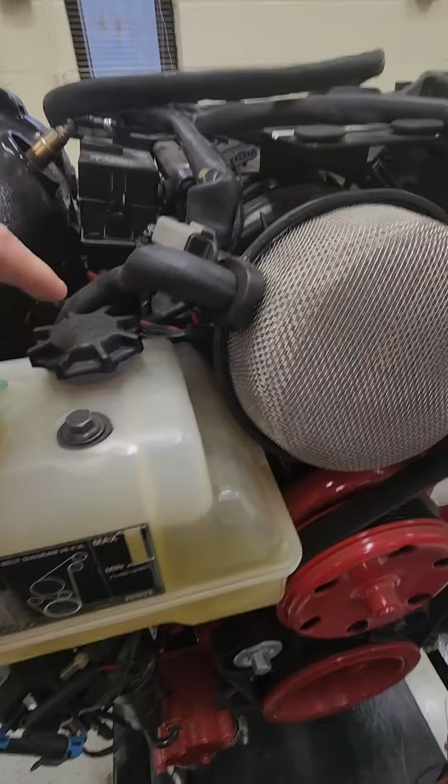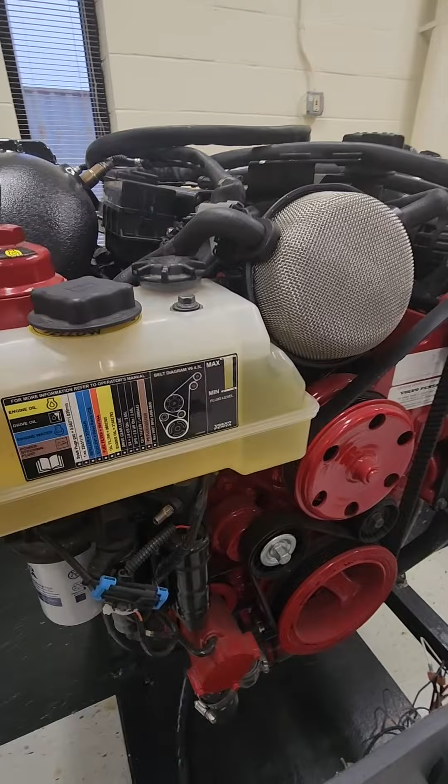There is a gentleman that apparently has a leak someplace on it, and it's only when it's cold, which is interesting. A little bit of antifreeze, summertime it's fine. My guess is when it gets cold it shrinks, and he's trying to get this tank off, so we're going to go over how to remove this tank. There are drain procedures in the workshop manual.

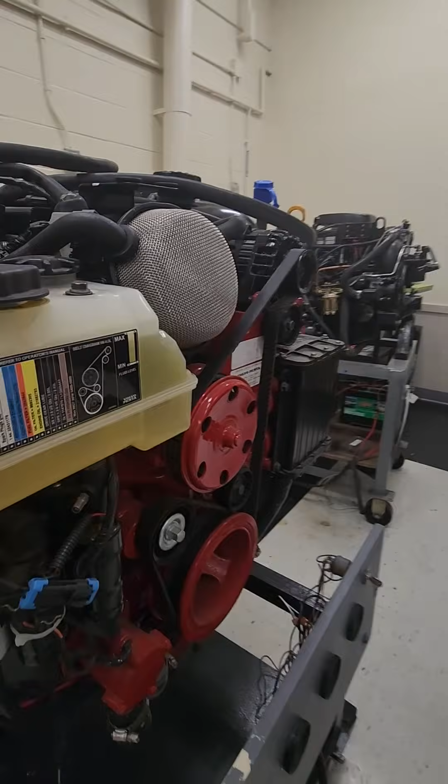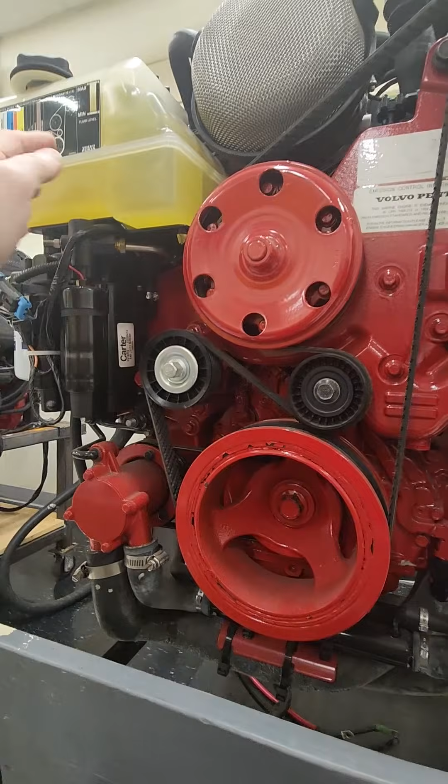Being a 5.3, it's a little more compact, but I'll show you that there are these clips, and these need to be compressed so that the tank can be raised up off of this. So there is one here, and the other one on a 5.3 is difficult to see, but I'll come around the other side here so you can see it. It's back in there, behind the fuel pump assembly.

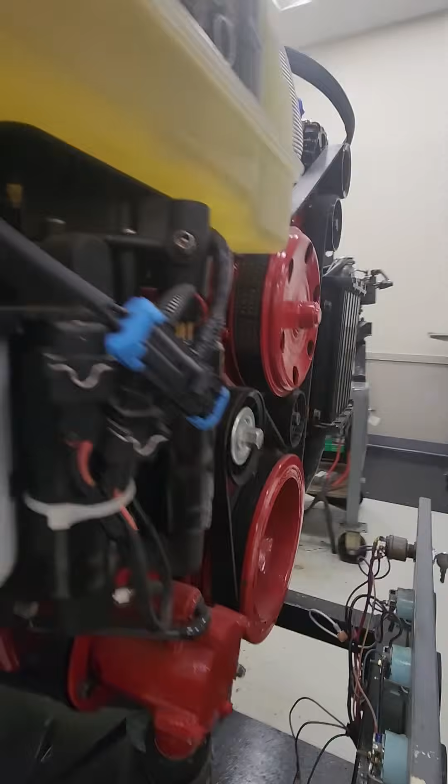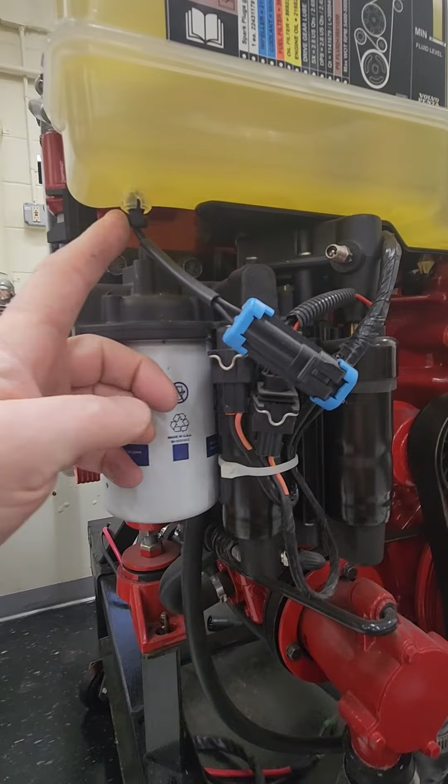So what I would do is unbolt the fuel pump assembly and let that drop down a little bit. You've got a fuel line here, just let that hang out. Make sure you cut the tie wrap here, disconnect this connection. This is your coolant level sensor. And once this is down out of the way, you can get at that back clip.

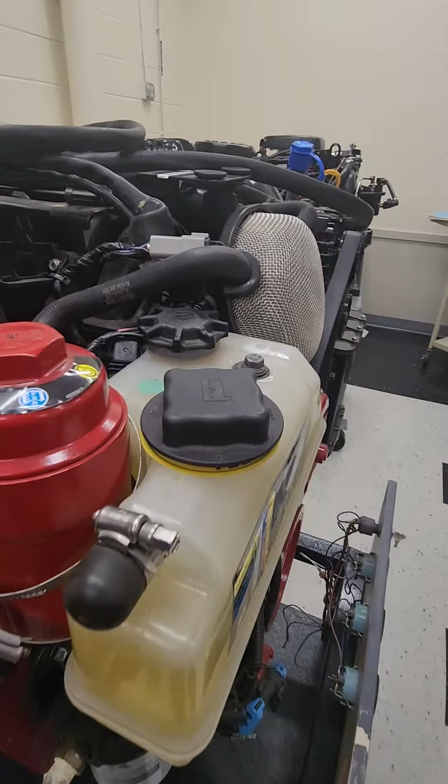There are then two power steering lines that we have to deal with, because if we want to remove this, the power steering lines are going to have to come off as well. One of them is on the back side, one's on the front side, but there also is this hose here, okay? That hose goes from the return, that's your vent hose that comes back. So you have to take this line off to get it off.

That is your coolant line. And then you have this bolt that you have to remove. So we have to unthread it and take that bolt. That bolts into the lower housing here. Now I'm going to go over to this 4.3 because it's a little more compact. There are fewer things in the way here, so you get a better view of what it looks like.

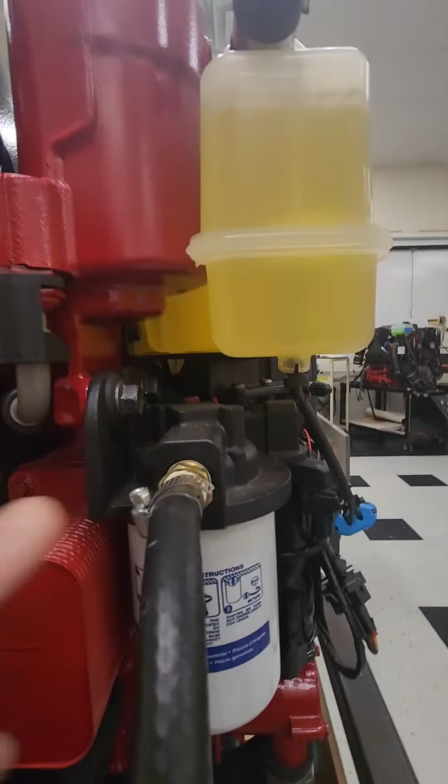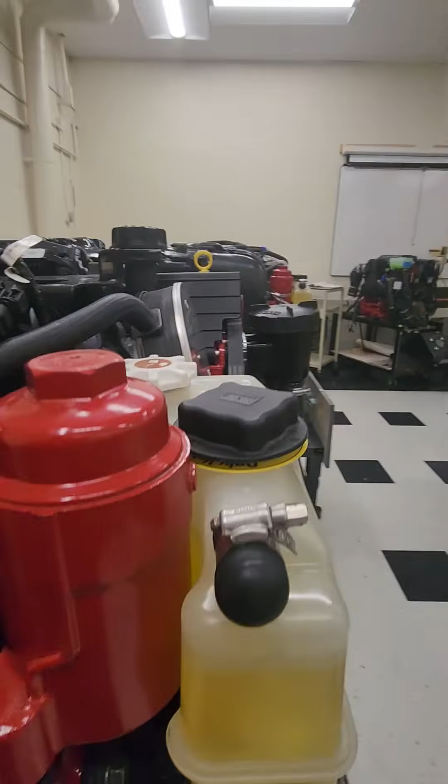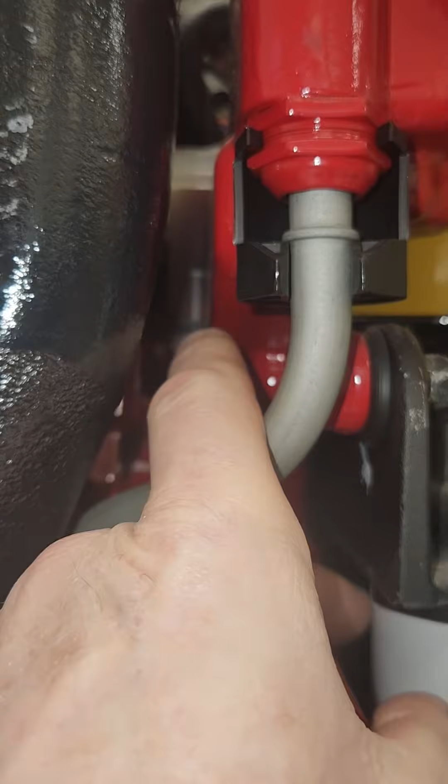So when we come down again on this model, there's that clip you can see way under here. You've got to take these two bolts to get the fuel filter assembly out of the way. Then you're going to again come back here, and again there's that hose, and then we're going to look for those two power steering hoses, and it's a little easier to see on this. One of the hydraulic lines is in the back of the cooler back here, and you're going to have a little bit of play on that hose.

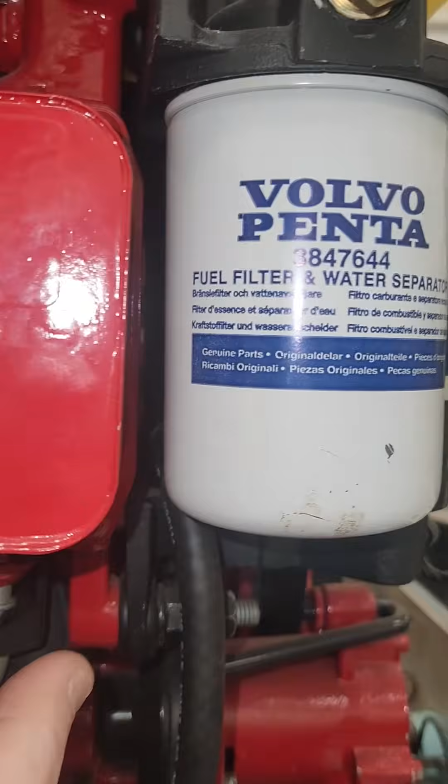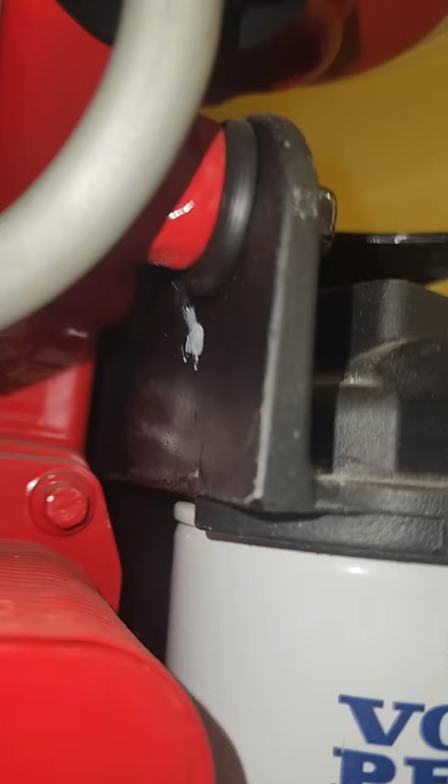That hose comes down here, and that rides up behind the oil cooler. All right, so here is the hose that's the coolant line, and that line comes around and goes to the power steering cooler, okay? And that line comes up here, and you'll see that it goes up behind the oil cooler, and then it goes up to the tank, and you can barely see it.

Back there, and that is going to be another clamp that you're going to have to put back on when you take this off. But you can get the tank off without removing that line. You have enough play there.

And then there's another power steering line. Right, so here is one of the power steering lines. It comes up from the power steering cooler, and that goes up to the bottom. If I back out, that goes to the bottom of the cooler, so that comes up into the cooler. That's a power steering hose.

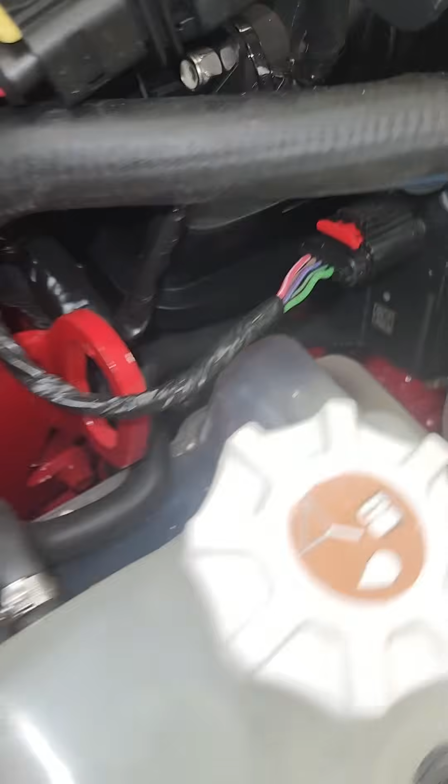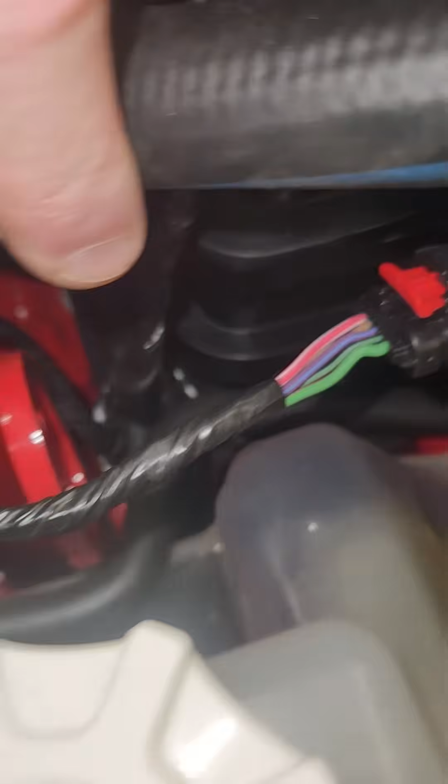The other one is on the top, and it's hard to see, but that one's underneath this hose, and that runs from the front of the engine down under the tank, so it kind of loops around underneath. So those two will be exposed once this comes off.

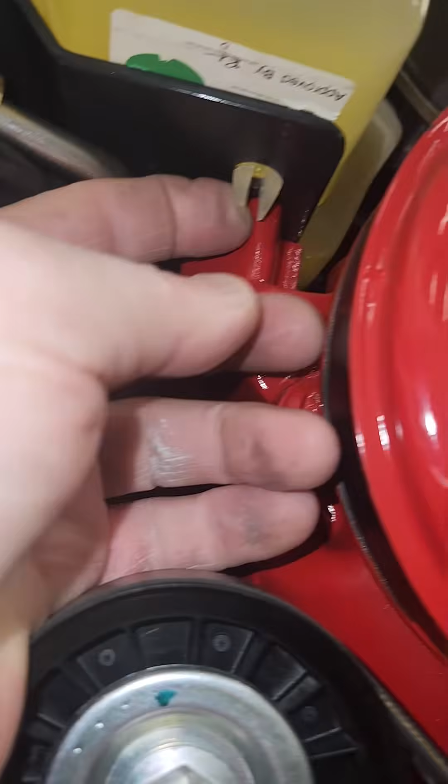So taking this off, probably the best method that I've seen to compress these plastic pieces is to get a short extension and find a socket, like a 12-point socket, and push it up, and the socket will just fit over these, and it will compress these when you push the socket up in there.

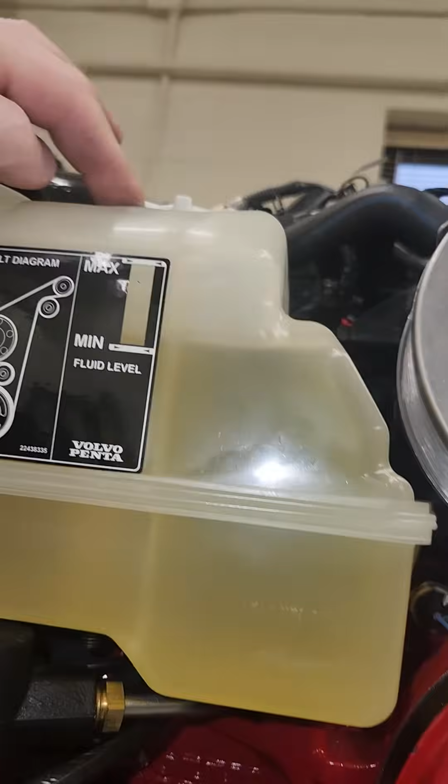The problem is this one, obviously, in the back, you have to take the fuel system, take that assembly out. Take the bolt out. Here's the bottom of the bolt, so you have to take the bolt out of the top. You have to compress this one. You have to compress the other one.

All right, to get these clips out that come through the bottom of it, take an 8 or 9 millimeter socket. I have a 9 millimeter socket in my hand here, and then when you push that in, you're going to put it on a ratchet, and it'll take two people.

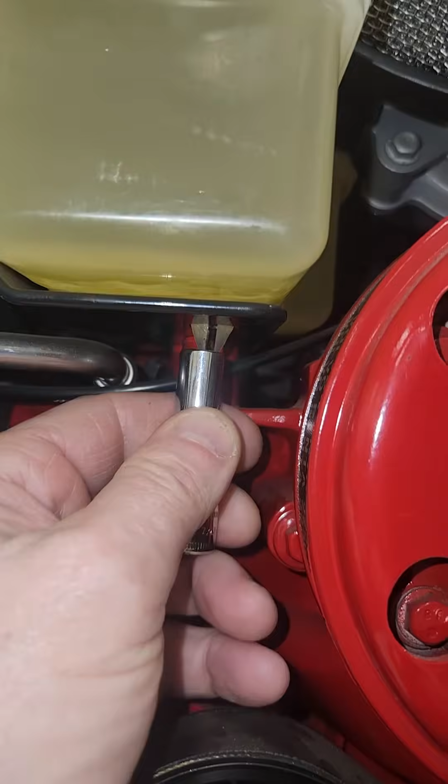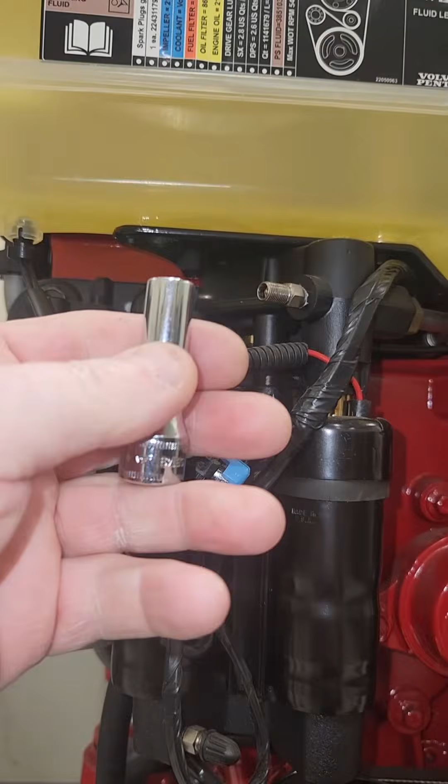Once the bolt's out, you can push on a ratchet real hard and push up on this one, and then take a V-shaped piece of plastic and just slide it in there and just push on it. And while you're compressing this, you can pop that clip loose and have it go around to the other side, right? And do the same thing with the socket and push up on it. That'll compress it so you can get that off.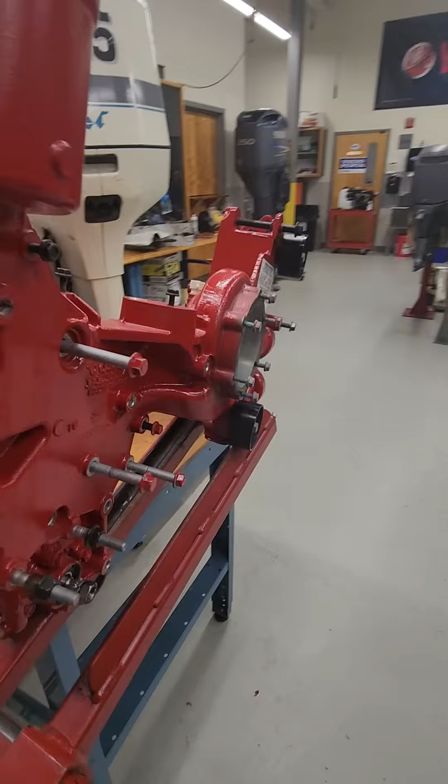You would actually have those two power steering lines. One comes in and loops underneath, and the other one would come up here behind the oil cooler and go in to the bottom of the expansion tank. The bolt that holds it on goes into the plate, so the plate is bolted right here and here.

So here's the plate that the actual expansion tank fits onto, and here are two bolts that I've left in here, so you can see the two bolts that hold that plate, and that's what the expansion tank fits on. Here is a recessed hole, and the expansion tank fits into there. There's two O-rings that go onto that tank, and that's what seals this.

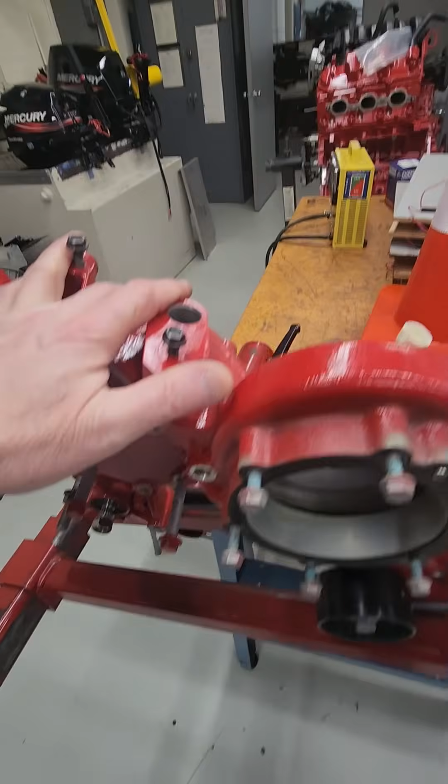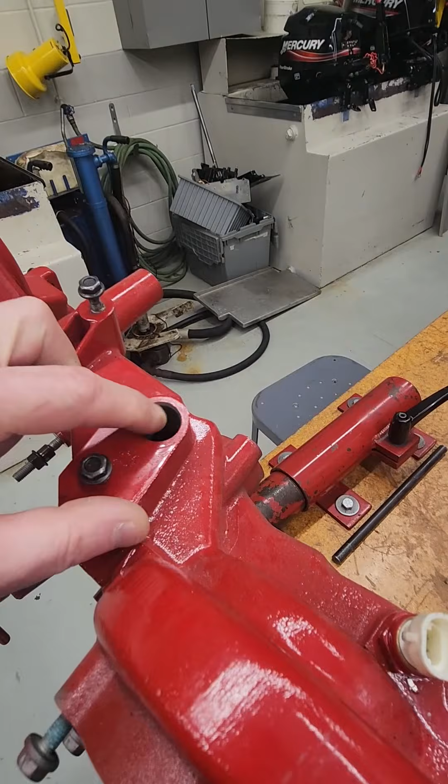So if you did ever take this off, you wanted to inspect it, what you can do is you can take that unit off, and there's two O-rings there to look at and see if they're cut or nicked. And I would look and see if this housing has any issues with it right here, a little corrosion or a nick in it, and maybe somebody caught the O-rings on initial installation.

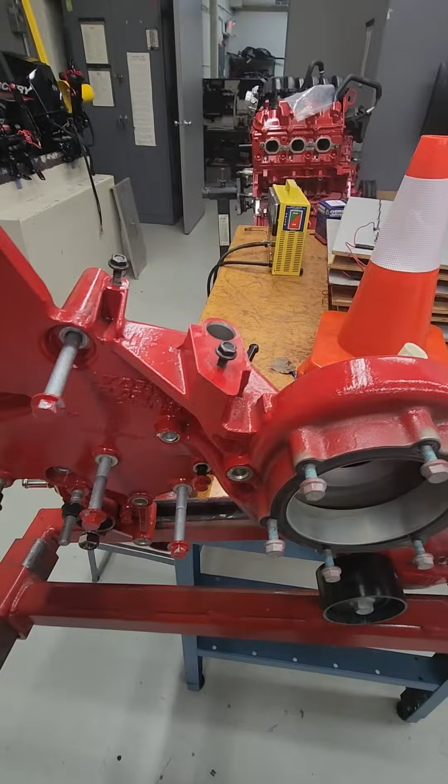I'm not sure where the coolant leak is coming from, but I would suspect it's the bottle itself maybe that's got a crack in it, a very, very fine crack. It is blow molded plastic, and of course, being plastic, getting hot and cold, that can crack. Or it is within the housing here.

So the only place for that to leak really is the sensor in the bottom of the tank, or these two O-rings here. There is no other area, except up high, where you wouldn't be able to miss it, where the vent goes into the engine.

So taking that off, again, you have the two plastic clips. One's about here, one's in the back. You have to take the fuel assembly off to get it out of the way to get to those two plastic clips, especially the one in the back.

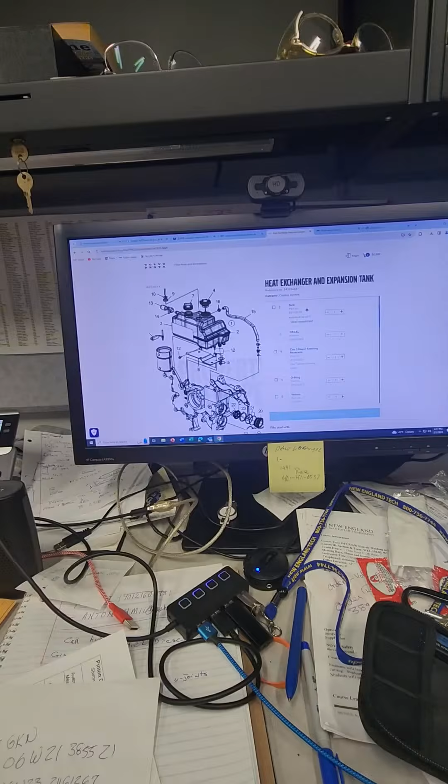All right, here's the exploded diagram of the tank online, and number 5 is the part number for the two O-rings for that tank. And those two O-rings are part number 225-04617. You do need 2 of them. I don't know if both come in the kit. My assumption is, being it says quantity 1, that there would be 2 in the kit, due to the fact that number 5 points to both of those O-rings.

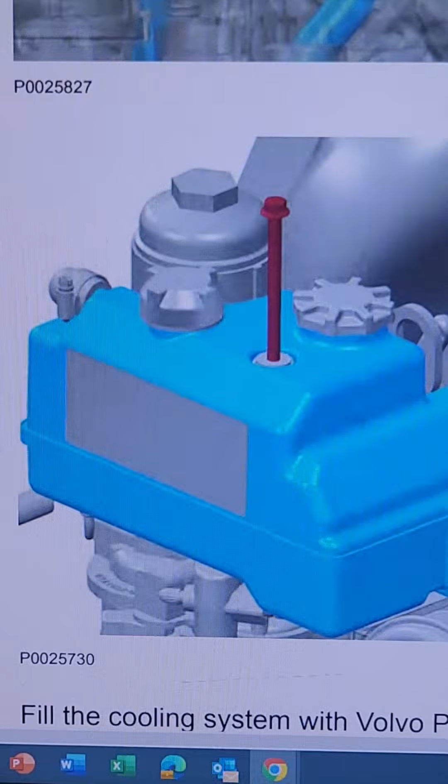Now the next thing is we need to put that tank back in, and then we want to torque that top bolt back in, the bolt that goes through the tank, and we'll look at that. Okay, so here's the bolt that goes through the top of that tank, and when you put that back in, I'd put a little bit of grease on it. It does thread through that steel plate. You don't want to have that get corroded, and the torque spec for that is 17.7 foot-pounds or 24 newton meters when you tighten it.

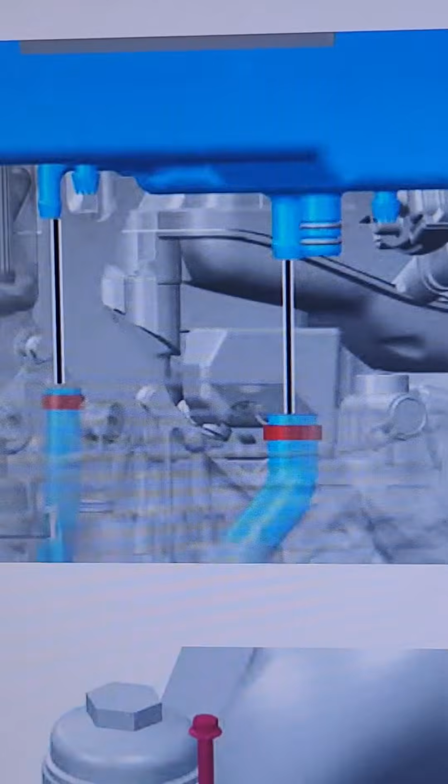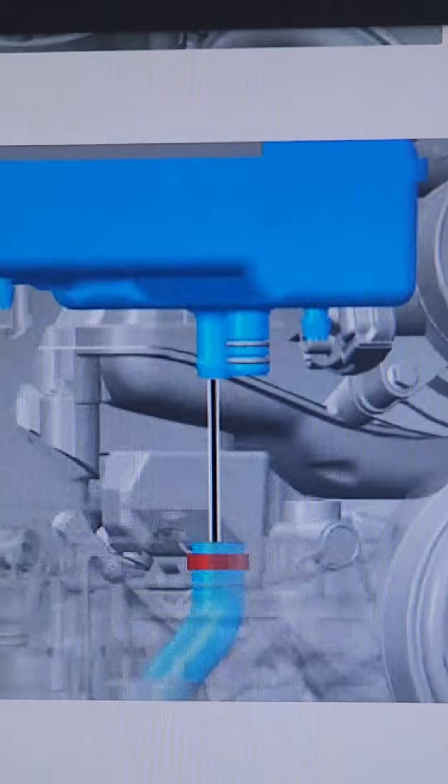Here's a picture of the bottom of the tank to get a kind of a view of what it is. You have the two hydraulic lines that take Oetiker clamps. There's one on the right that's a little larger. That's in the back. That's going to be really not accessible until you actually remove the tank. Those hoses will stretch up and you could take the Oetiker clamps off, and then the one on the left. And as you can see in the picture, there's the two O-rings that are going to fit down inside of the unit itself, that tapered area I showed you.

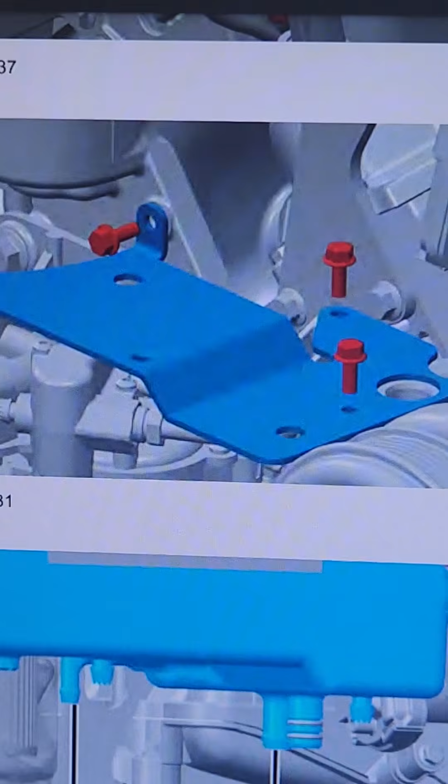So if you do remove the power steering coolant expansion tank, and you want to remove that steel plate, there are 3 fasteners that hold it into the engine, and when you put it back together, you tighten those to 10 newton meters or 7.4 foot-pounds. Since these are O-rings, I would definitely replace them if you ever do remove this tank. It is highly recommended that you replace those O-rings. I never reuse O-rings, ever.

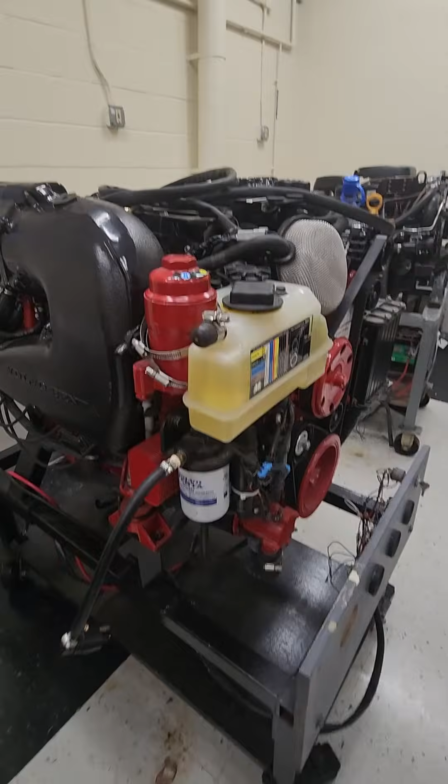It's an odd one that it leaks a little bit when it's cold, but it's fine during the summer. And it may be that this surface area here where these two pieces are glued together, when it gets really cold, they shrink, and that's why there's a little bit of leakage. I would doubt it's the O-rings. I would assume it's probably the housing itself. It's possible it's the O-rings, but until you get it apart, you really wouldn't know.

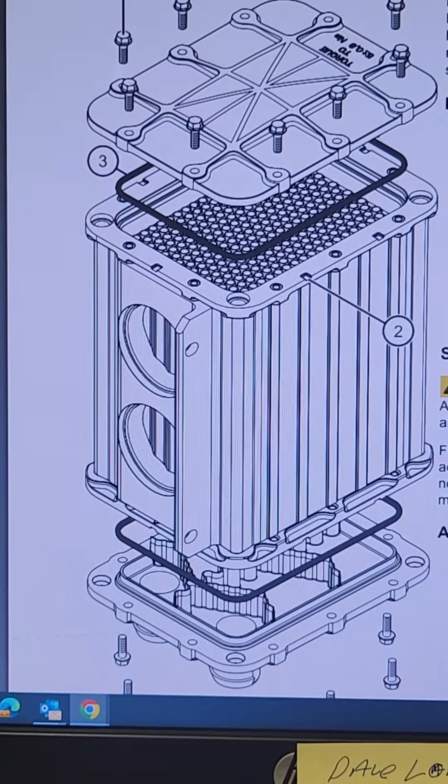Okay, so here's the heat exchanger as well, and if you do decide to take it apart to clean it, there are a bunch of bolts there. You have to remove it. You take these 2 bolts out of the engine, and then the 2 hoses on the bottom. What I would do also is I would take some white out and put a couple of marks here on the top cover and maybe down here on the housing someplace, and then I'd put a couple over here and on the bottom cover. This way you can't put this cover on the wrong spot, and you can't invert it and put it on backwards. The hoses have to line up in the right place.

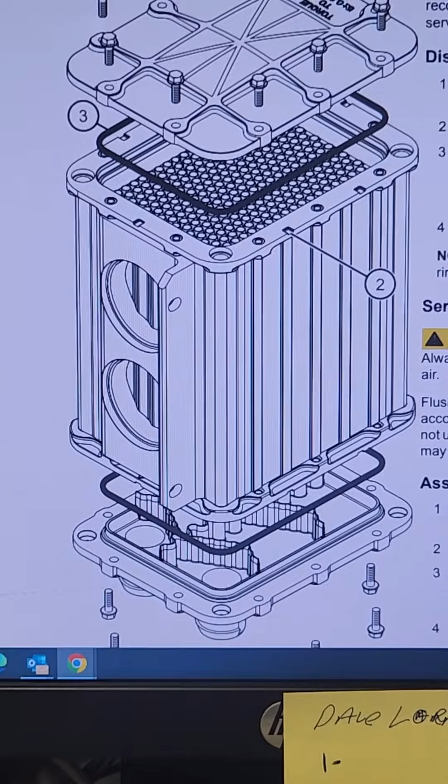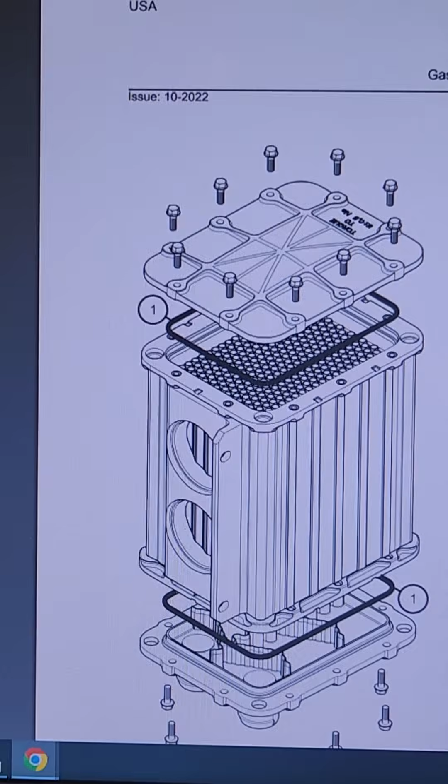There is a new part number online for those gaskets, and the torque spec for the bolts when you put it back together is 44 inch-pounds. Do not over tighten those bolts. All right, the part number for those gaskets, you're going to need to order 2 of them because they come individually. That's part number 1, and the part number is 942770. And again, you will have to order 2 of those because they're shipped individually.

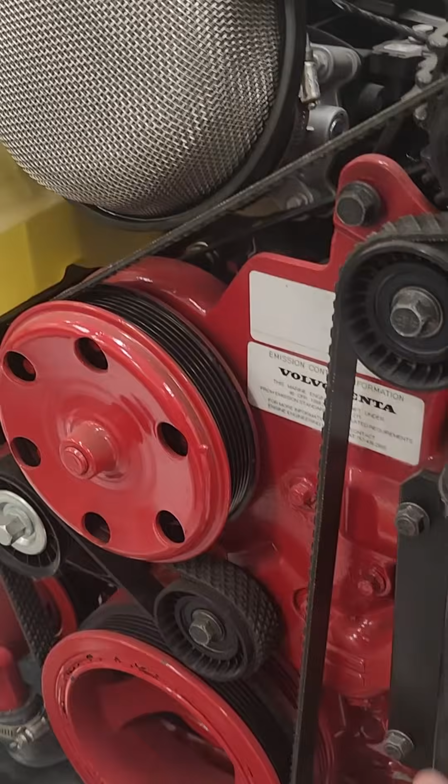These gaskets work on all 4.3, 5.3, and 6.2 units. The 6.2 units obviously are larger. It's a longer heat exchanger, just a taller unit, but the caps and the covers and the gaskets are the same. All right, so I tried to do a little video here for you on that heat exchanger. There are gaskets for it now for that top cover here, under here. Again, removing those 2 bolts here, and then of course the 2 hoses on the bottom.

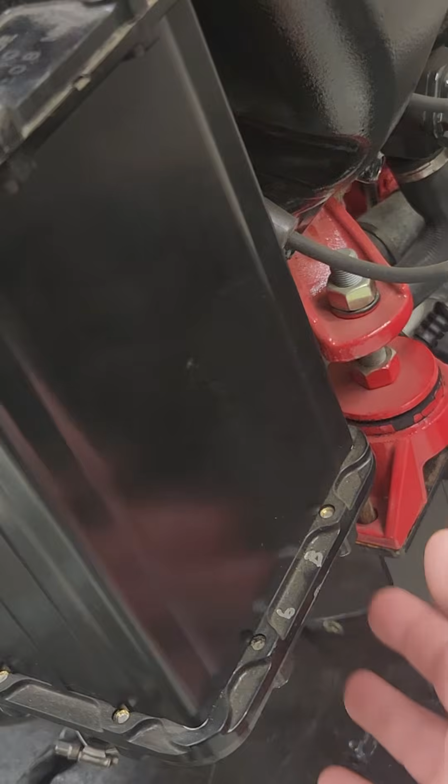And I would take some white out and put one white out strip here and here, or pieces of tape, whatever you want to use. And then also do the same thing on the end over here on the bottom of it, so I can't mix up the top and the bottom and invert the unit, because it does all have to go on one way.

So I hope this helps you understand a little bit more about servicing that expansion tank and servicing the heat exchanger, which is readily accessible. It's pretty easy to get on and off the engine. The expansion tank's a little bit harder, but if you want to remove it, you can see there's 1 bolt, the 2 clips, and then you have to deal with the hydraulic lines.